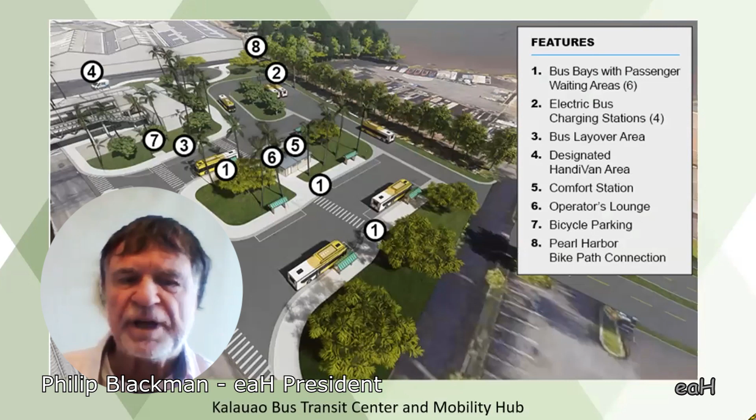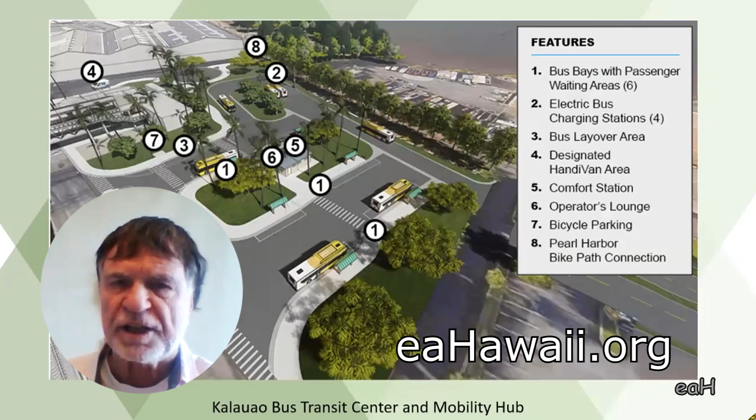This month's Olelo program features Parker Kushima, who was with the AmeriCorps Vista program, which attracts 5,000 participants to serve annually to alleviate poverty by helping local organizations expand capacity for change. The Hawaii State Energy Office and Hawaii's Climate Commission sponsored Parker Kushima's one-year mission. Parker talks about his work on mobility hubs on all Hawaii islands, and explains how mobility hubs can reduce energy use and provide better disaster resiliency in Hawaii. Parker's passion is working to invent the future, and he now works for the Hawaii State Energy Office as outreach and community engagement specialist and clean energy wayfinders coordinator.

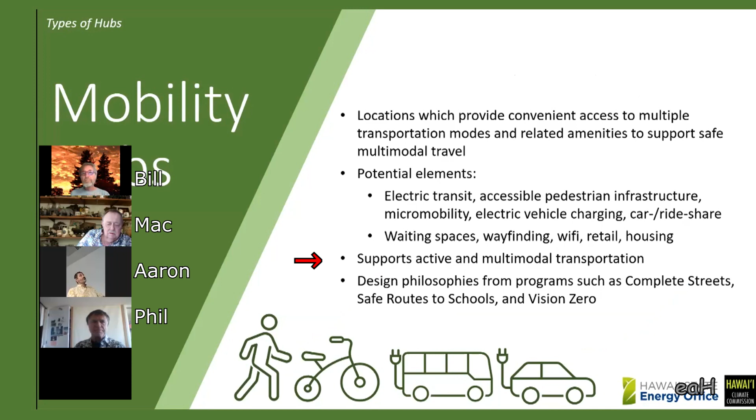They make it easier and more convenient for people who may not have access to or are trying to transition away from single occupancy vehicles. This can lead to reductions in vehicle miles traveled, or VMTs, and associated greenhouse gas emissions, while supporting equitable access to mobility.

Mobility hubs also incorporate ideas from many programs which aim to enhance clean, equitable, and resilient transportation, including Complete Streets, Safe Routes to School, and Vision Zero. These programs address safety and climate concerns, two areas core to the function of mobility hubs.

I've also had the pleasure of organizing presentations from mobility consulting firms Alta Planning and Design and Nelson Nygaard during my past year of Vista service, to share their experience and industry knowledge of mobility hubs across the nation. The Alta presentation is available on the Climate Ready Hawaii website, which I'll link after this. Please check out that presentation for further details about mobility hubs, including land use and siting considerations, implementation and policy strategies, and the role of mobility hubs in COVID recovery.

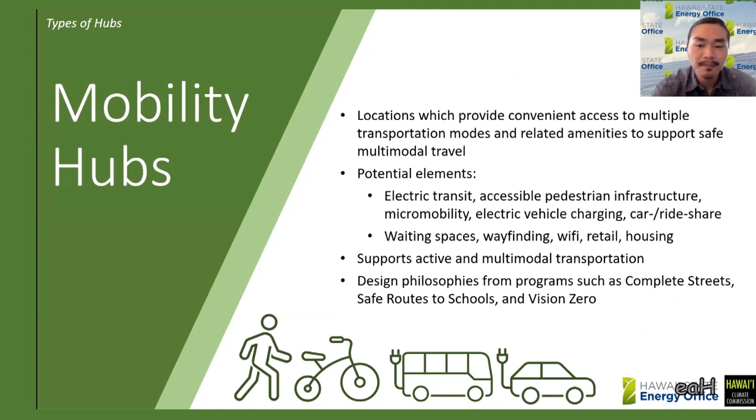The next hub type I'd like to explore are resilience hubs, also sometimes called community resilience hubs. The Urban Sustainability Directors Network, or USDN, defines resilience hubs as community serving facilities augmented to support residents and coordinate resource distribution and services before, during, or after a disruption.

When designed well, resilience hubs can equitably enhance community resilience by improving local quality of life, reducing greenhouse gas emissions, improving access to public health services, reducing burdens on local emergency response teams, and fostering community cohesion.

Resilience hubs are tailored to the specific needs of communities and are often built around established, trusted community spaces such as schools, public libraries, or community centers.

They can include elements such as access to renewable energy, food, water, and resource distribution capacity, basic health and medical supplies and services, information and communication infrastructure, and logistical coordination capacity.

An important thing to note is that resilience hubs are designed to serve communities before, during, and after disruptions, such as natural disasters or global pandemics.

Resilience also often comes to light in times of disruption or recovery, but also plays an important role in everyday normal life. Resilience can strengthen communities by providing safe and accessible spaces for events and programs, and can help communities become more aware of and familiar with resilient elements such as resource distribution and access to information and communication, to better prepare themselves for worst case scenarios.

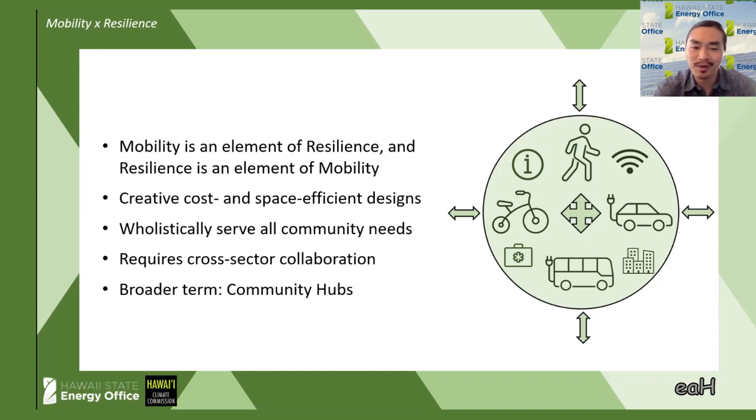Broader terms like community hub and improved collaboration between sectors may allow creative and resource-packed design ideas, hubs that serve the general needs of communities. These may include access to multimodal mobility, housing, food, social services, healthcare, emergency services, employment, recreation, or energy, just to name a few. The goal of combining hub elements becomes more feasible when you introduce the idea of modularity.

Components can be added through retrofits to enhance the existing functionality of a space and provide more comprehensive services that weren't included in the original scope of a project.

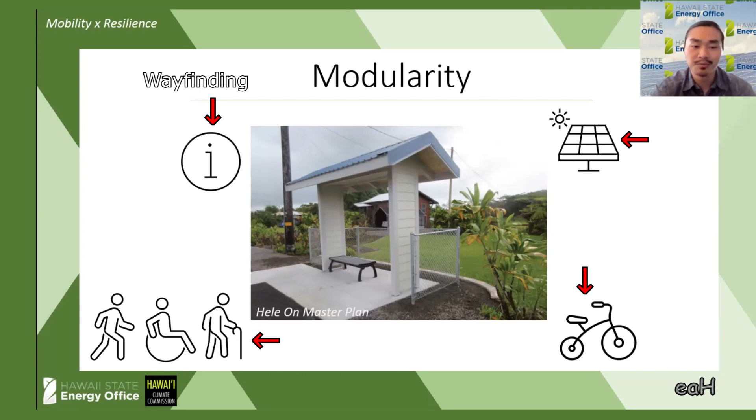For example, take an ordinary bus stop with no additional features, like this one on Hawaii Island. Now, adding a bike rack, improved visibility and accessibility of pedestrian crossing, and accessible updated wayfinding information, and you've created a small mobility hub. Adding in a solar panel to the roof with charging stations for devices, public Wi-Fi, and basic medical kits can further enhance the functionality of the location, creating a space that people want to be in and not just one that they need to be in.

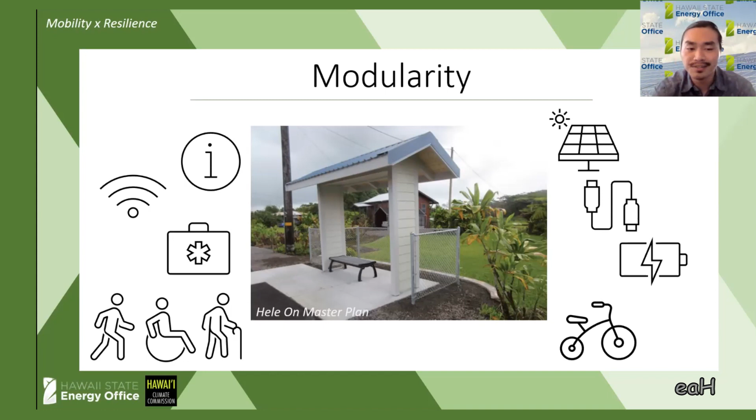And really, the sky's the limit when factoring in modular elements, and creative design provides the opportunity to make efficient, low-cost adjustments to completely transform our community spaces.

Another consideration for hub design is scale. A hub in dense urban environments with robust public transit and close proximity to a variety of locations, such as downtown Honolulu, will look very different from a hub in a more rural location like in Waimanalo. The scale of a hub will be entirely dependent on the geography, population, and existing infrastructure of an area, and listening to communities will provide the insight necessary to design an appropriately sized hub with the right amenities and services.

Now I'd like to take some time to look at examples of proposed hub projects across the state. Many of these proposed projects and plans are mobility hubs, but as I discussed before, mobility is a component that enhances broader community services and amenities to create comprehensive community spaces.

Starting with the County of Kauai, the County of Kauai is currently pursuing 3 major potential mobility hub projects at the Lihue Civic Center, Mahelona Hospital, and the North Shore Resort areas.

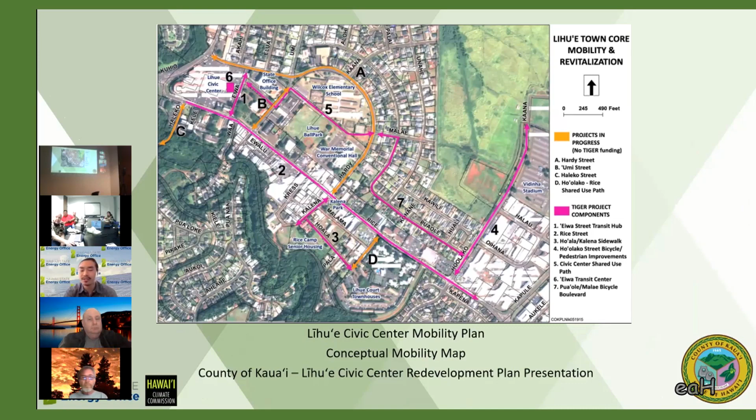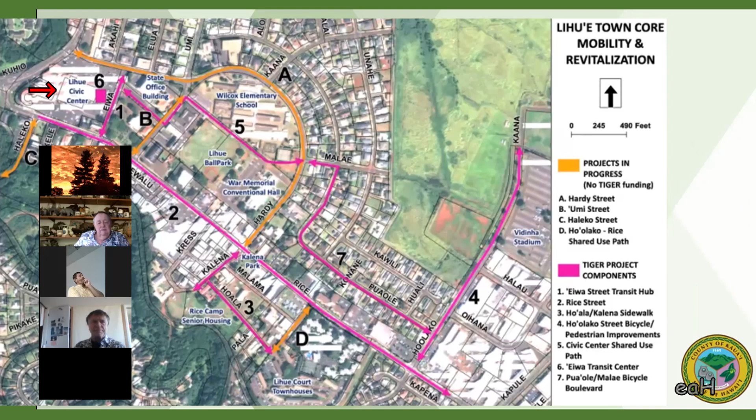The conceptual Lihue Civic Center mobility plan is a core component of a larger redevelopment plan, which intends to solidify the Civic Center as a mixed-use civic and commercial anchor for Lihue town and the island as a whole. The proposed mobility plan will integrate mixed-use TOD development, a mobility hub, and a parking management strategy to create cohesive and robust transportation networks within Lihue town.

The plan envisions a small mobility hub and transportation network which supports services such as transit, car and ride share, and micromobility options, and connects to related amenities such as affordable housing, commercial businesses, a child care facility, and the Civic Center itself. Future potential TOD development on nearby state properties are also being considered in the plan as modular additions. This project is a great example of the potential for mobility hubs and their extended networks to build off of existing trusted community spaces to revitalize an entire community and provide safe and accessible mobility options.

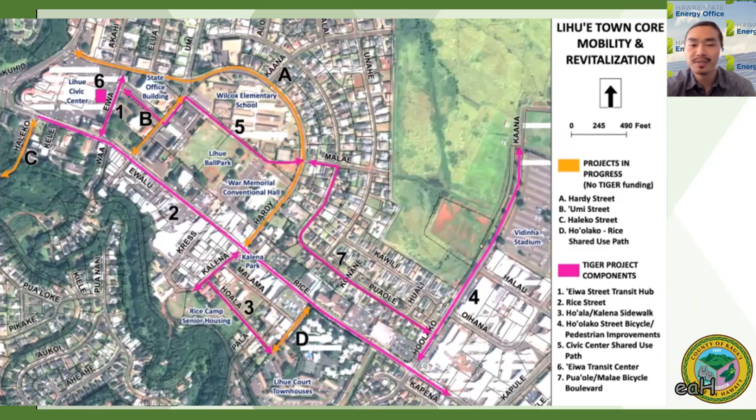I'm also glad to share that the Lihue Civic Center Mobility Plan has received TOD CIP planning funds to procure a contract with a consultant to further develop their plan.

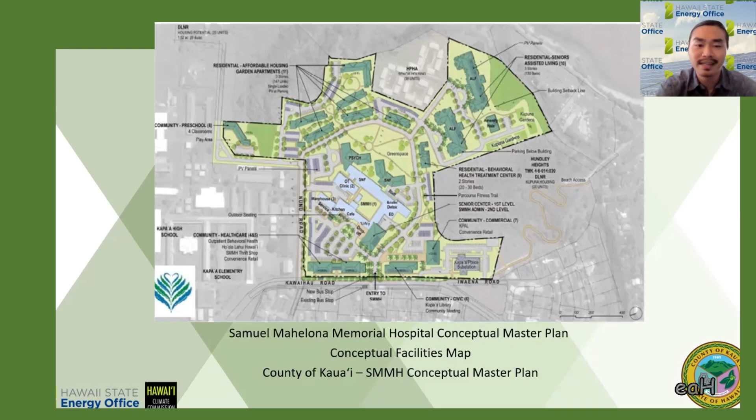The Samuel Mahelona Memorial Hospital Conceptual Master Plan aims to evaluate potential services which will enhance the campus and surrounding community, considering adjacent state lands and community needs and desires.

Potential services may include affordable housing, relocation of the HPHA senior housing, siting of a proposed county police station, preschool facilities, a potential public library, and an on-site mobility hub, which may include car share, pedestrian connections to existing on-street bus stops, micromobility sharing, and bike parking.

These potential mobility amenities are intended to reduce on-site parking demand and encourage transit and multimodal transportation use. Centered around the hospital campus, this wide variety of services and amenities aims to create a continuum of care for seniors and behavioral health, and ideally create a campus that is the model for multi-generational, multi-use healthcare wellness facilities.

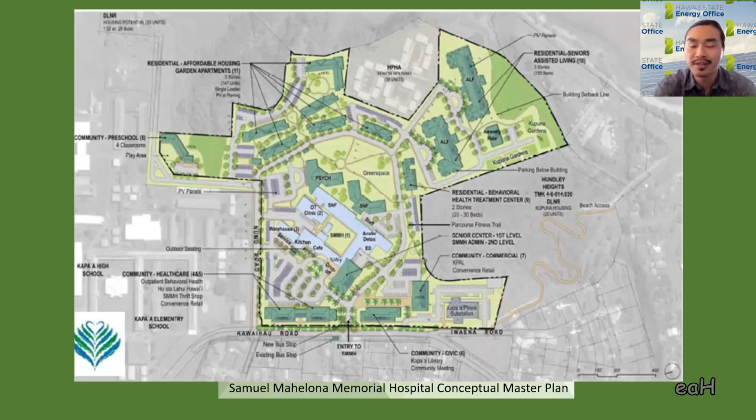The final Kauai example is a proposed shuttle service and mobility hub project, which aims to change the model of how visitors get around the island.

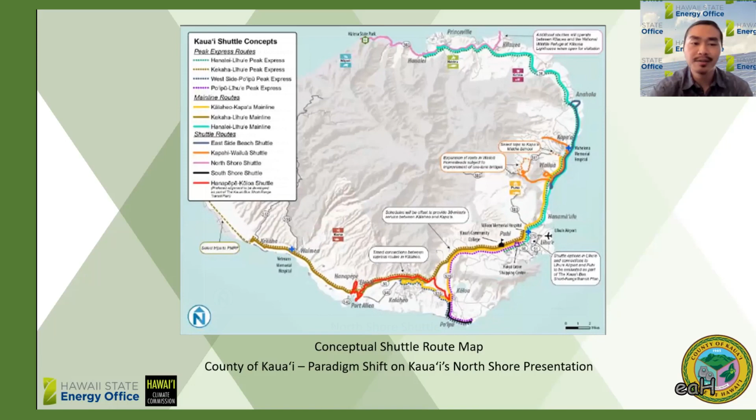The county is focused on reducing visitors' reliance on single occupancy vehicles by transitioning to shuttle services from the airport to resorts, local shuttles, micromobility options within resort areas, and short-term car rentals or car share at resorts instead of weekly car rentals.

Mobility hubs at the airport and within resorts such as Poipu, Princeville, Hanalei, and the Coconut Coast could act as endpoints for these transit lines, integrating shuttle services, micromobility options, and improved bike and pedestrian infrastructure, as well as the Kauai bus. These mobility amenities could also serve resort employees, reducing their need for single occupancy vehicles as well.

This example shows the opportunity for hubs to address a specific industry or population, namely in this case the tourism industry and visitors, by identifying an existing area for improvement and developing cleaner and more equitable solutions.

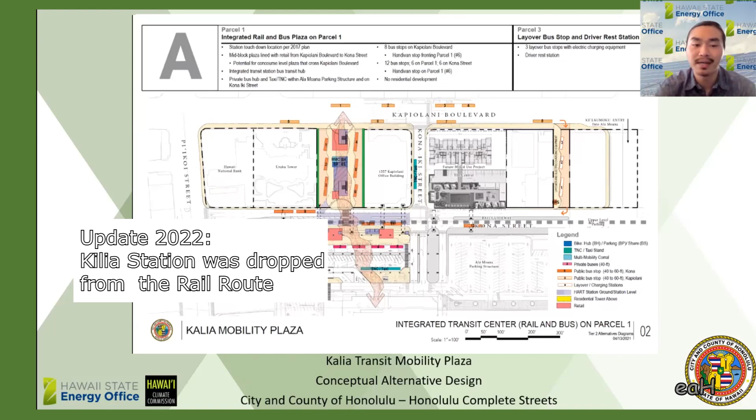Looking at the island of Oahu, the City and County of Honolulu's proposed mobility hub plan centers around the rail and the bus as strong transit backbones to create a safe and convenient mobility hub network. While there's potential for mobility hub elements to be incorporated in many, if not most, of the rail stations and their surrounding neighborhoods, there are two major upcoming projects: the Kalia Transit Mobility Plaza and the Kalauao Bus Transit Center and Mobility Hub. The Kalia Transit Mobility Plaza will anchor the eastern end of the rail system at the future Ala Moana rail station and aims to create an iconic plaza which serves many people and purposes.

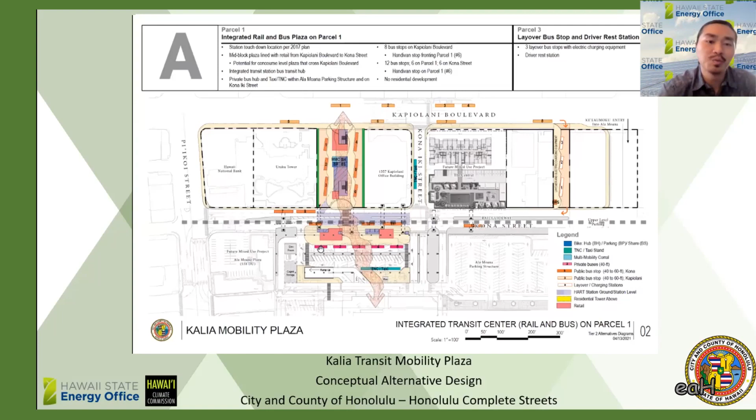This image shows one of the proposed designs from the alternatives analysis presented at a recent community meeting. The proposed designs prioritize efficient connection between the rail and bus system, bicycle infrastructure, passenger facilities including shelters, real-time information,

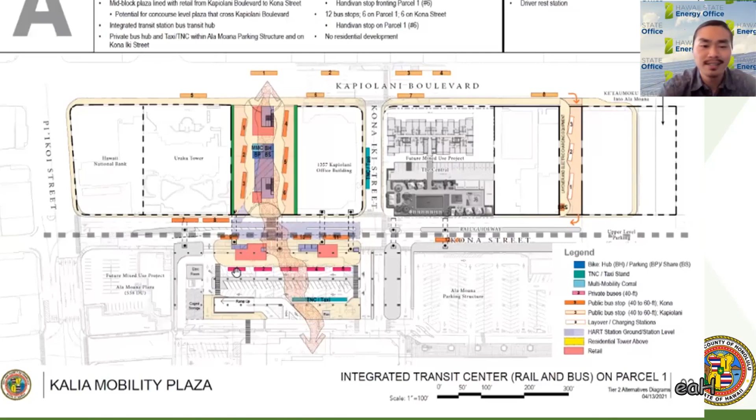wayfinding, fare machines, and retail, and safe, accessible, and convenient pedestrian corridors for individuals with disabilities and transit-dependent populations. The Kalia Mobility Plaza's location in Ala Moana Shopping Center and connection to the rail is highlighted as a notable example of a large-scale urban mobility hub with the potential to drastically shift the mobility environment of the downtown Honolulu and Waikiki areas. This project is currently undergoing an alternatives analysis comprised of community engagement and multimodal assessments to identify

best design options based on data collection and community input, and is planned for construction in 2024 to 26. Next, the Kalauao Bus Transit Center and Mobility Hub is planned to serve the Pearl Ridge, Pearl City, and Aiea regions to improve multimodal transportation for the rail station and surrounding areas. This image here shows a proposed design for the hub. The function of this hub is similar to the Kalia Mobility Plaza, focusing on bus and rail connections with accessible bike and pedestrian infrastructure, including a connection to the widely used Pearl Harbor bike path.

The planned inclusion of 4 electric bus charging stations also brings the city closer to its goal of 100% renewable powered bus fleet. The Kalauao Mobility Hub has completed its final environmental assessment, with upcoming neighborhood board update meetings in the next few weeks and construction planned to begin in 2024.

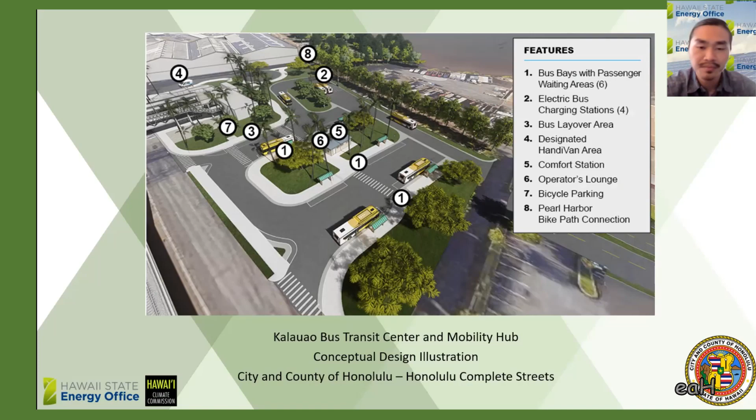Next, we'll take a look at the Kaimuki Middle School Microgrid project. Kaimuki Middle School is planning for a microgrid project, which enhances its capacity as a resilient disaster relief shelter. Kaimuki Middle currently has a photovoltaic, or PV, system connected to the grid, but this project intends to add a battery backup system and the ability for the PV system to operate independent of the grid for 8 to 12 hours, depending on conditions. Since schools are trusted community spaces, and Kaimuki Middle School is the designated shelter for the densely populated East Honolulu, the school and the surrounding communities can benefit greatly from the increased disaster preparedness and energy security offered by a microgrid.

The project is planned to be funded through FEMA's Building Resilient Infrastructure and Communities Program, or BRIC program, and is currently under consideration and pending approval. The school will also work with the Diamond Head Post-Disaster Energy Backup and Response Working Group, facilitated by Kapi'olani Community College, or KCC. KCC houses a 1.74 megawatt grid-independent PV and battery storage system, in addition to a multitude of resilience hub elements, including food distribution

capacity and emergency response training. Kaimuki Middle School and KCC, along with nearby state emergency response facilities, can create a strong network of resilience in East Honolulu and serve as a great example of coordination to best serve a community.

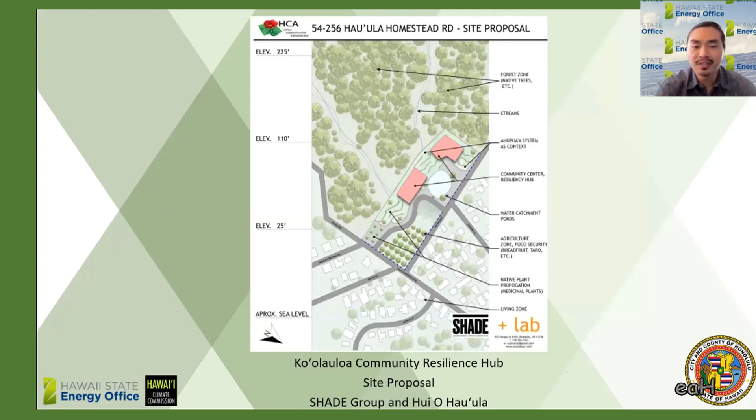And finally, for Oahu, we'll look at the Ko'olauloa Community Resilience Hub. The Ko'olauloa region of Oahu is a notable focus area for resilient infrastructure. A single main road provides access to much of the North Shore, leaving it vulnerable to coastal hazards and lack of access in disaster scenarios. Hui O Hau'ula has acquired land to build a resilience hub with the Shade Group and other partners, which will serve the Ko'olauloa region not only as a disaster relief center, but also as a community gathering space.

The site plans to include access to critical resources such as water, electricity, food, and medical services, and is modeled in the context of an Ahupua'a system and Hawaiian culture, with different functions carried out across the hub. The lower area here indicates and includes native agriculture and medicinal plant zones, while streams and native forests expand back into the mountain.

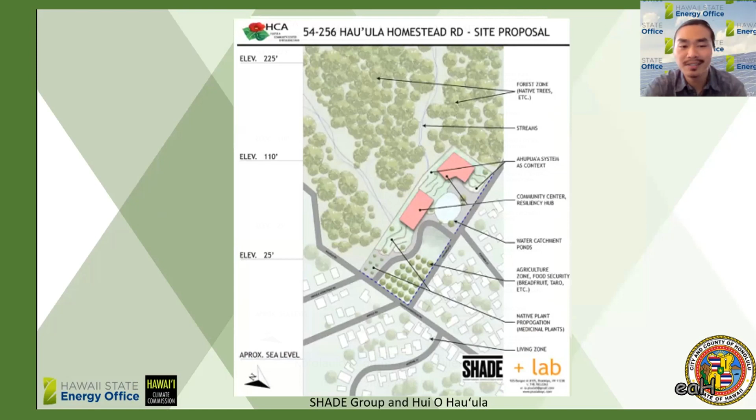This design not only provides resilient capacity, but will also allow for native Hawaiian culture and practice learning opportunities to holistically serve the resilience and cultural needs of the Ko'olauloa community.

Now moving on to Maui County. Maui MPO's Hele Mai Maui Long-Range Transportation Plan for 2040 identifies mobility hubs as a priority transit improvement to improve efforts along the major TOD corridor and make getting around Maui more convenient and comfortable.

The Kahului Transit Hub is being developed along the TOD corridor near important destinations including the Kahului Public Library, Queen Ka'ahumanu Center, Kahului Shopping Center, schools, and future housing. This location will serve as a key connection point for many transit routes with safe and accessible bike and pedestrian infrastructure. Kahului is one of Maui's major employment centers and houses a major airport.

It has a high density of bike and pedestrian crashes and fatal car crashes, and has been identified as a critical equity focus for the islands with populations who have higher reliance on non-auto forms of transportation. These considerations, along with identified widespread community interest in more sidewalks and bike lanes, more reliable bus service, and less traffic, establish the importance of the Kahului Transit Hub as an integral piece of Maui's transportation network.

Construction on this hub is in progress, but is currently delayed due to COVID-related supply chain issues.

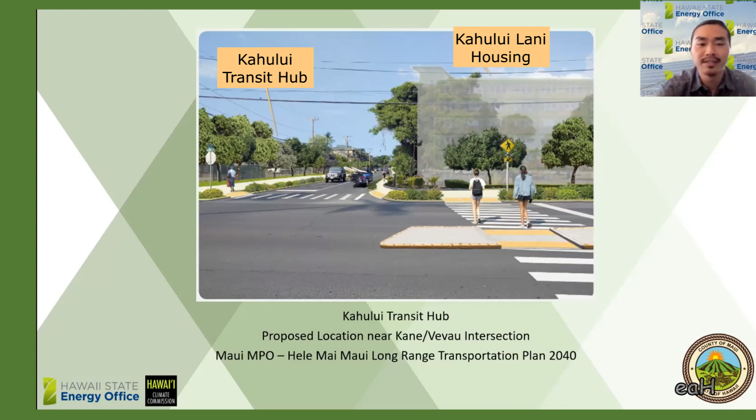And finally, taking a look at Hawaii Island. The County of Hawaii's Hele On Transit and Multimodal Transportation Master Plan identifies many potential hub locations, built primarily around existing and planned bus routes. Due to Hawaii Island's size, transit is an important and necessary service to connect people to their destinations.

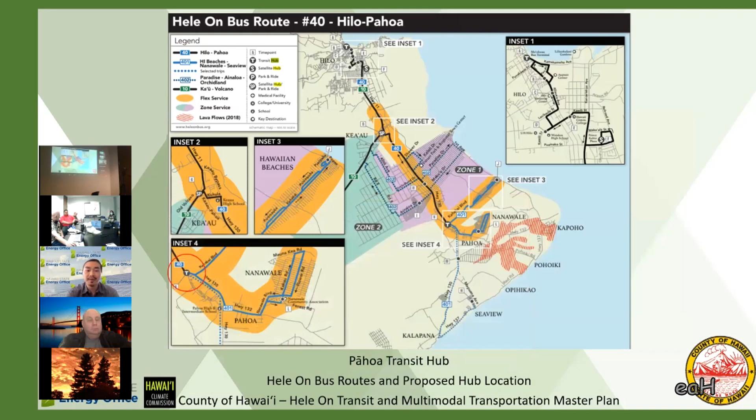The plan notes the creation of transportation hubs and bus stops with amenities that provide rider comfort and safety, and that help support community and village gathering places, as one of five major goals to support the plan's overall vision. A hub in Pahoa is identified as a top priority for implementation.

The Pahoa hub would include transportation services such as bus transit, bike share, bike parking, and other micromobility options, and passenger amenities such as shelter, lighting, electronic signage, fare machines, and restrooms. This hub also aligns with increased bus service and new flex routes for lower density corridors to support multimodal travel across the island, and these routes will connect to the hub when it's completed.

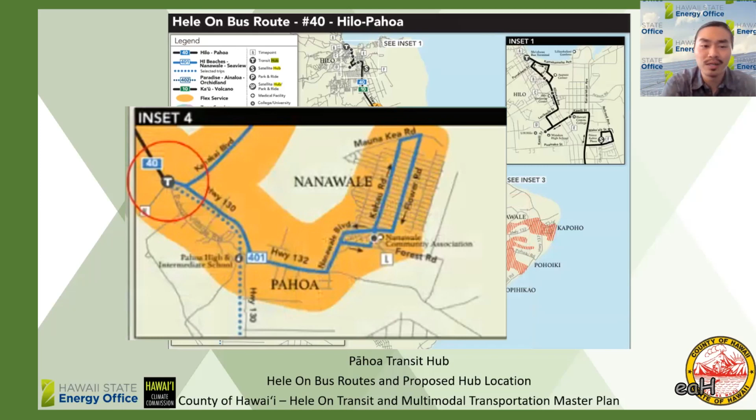I'm also glad to share that the Pahoa hub has received TOD CIP planning funds and is currently in the final selection process to recommend a site for purchase before beginning the design phase. This project is planned to be completed in the next 2 to 3 years.

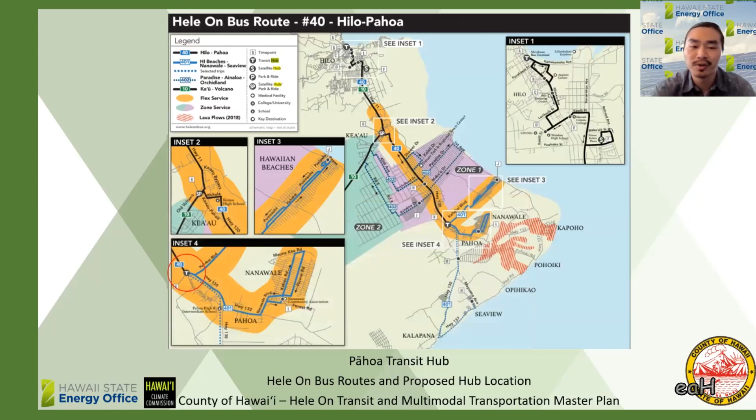Many other hubs are also recommended for Hawaii Island in locations such as Kona, Kea'au, and Hilo, and all bus stations across the island are under consideration for incorporating additional hub elements to increase connectivity and safety.

As I covered earlier, these elements can be thought of and implemented as modular additions to hub designs to comprehensively meet a wider variety of community needs. And if all hubs in Hawaii were designed with an open mind and the goal of feasibly addressing as many community needs as possible, we can only imagine the extent of community benefits.

Another idea that I have, and one that I believe is especially important for Hawaii, is to incorporate a strong sense of place within hubs. I mentioned earlier that hubs have the potential to tell fascinating stories about the places in which they're located, and as we all know, every place in Hawaii has a story to tell.

This is a huge opportunity for communities to be heavily involved in the design of hubs. The level of richness and history gained by speaking with kupuna and the people who call a place their home can't be matched by any quantitative data out there.

This could be implemented by bringing in local artists and designers to help design the aesthetics of the hub and incorporate stories in visually and culturally interesting ways.

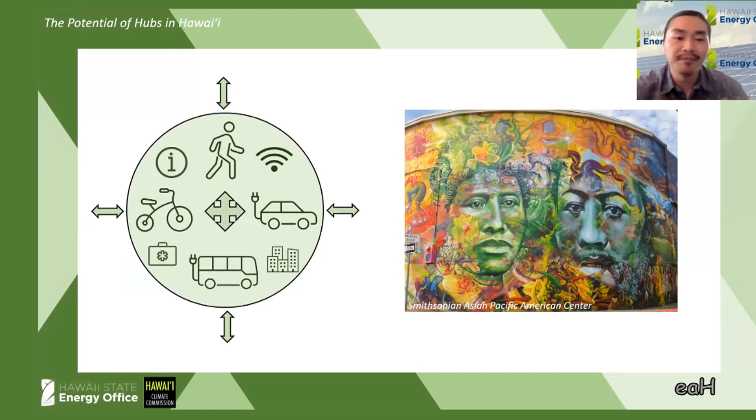With all of that, hubs have a huge potential to shift the ways in which we view and design community spaces here in Hawaii. By incorporating best practices from around the world, community knowledge and understanding, and various hub types, we can help create a clean, equitable, and resilient home for all.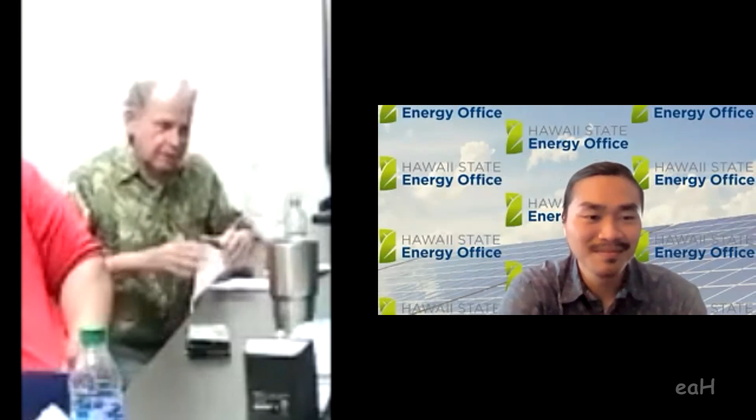Thank you, Parker. At risk of dominating this whole thing, I'm sure the rest of this vast audience is brimming with questions and comments. But one final one: as recently as 300 years ago, the huge majority of our ancestors were utterly, totally, completely illiterate. You mentioned stories twice as you're going around the community deciding where to place a hub. You want to get stories, and then when you place the hub, you want to incorporate stories to enhance the sense of place there.

So congratulations on that one. Now I'll turn it over to your vast and brimming audience here. Thank you, Howard. Go ahead, Phil.

If you were to make an overlay on some of these hub locations and the distribution of the households, the household income, and where the people are working, how much is linked through that hub to full-time employment and a happy life there, or how much is it for another nice place to visit that folks from other places are trying to take advantage of? I'm thinking of Maui, the Whalers Village, for example. It isn't a direct, it's a nice hub, it has a lot of nice features, but if you did an overlay of the homes directly gaining an economic advantage, I don't think you would see that.